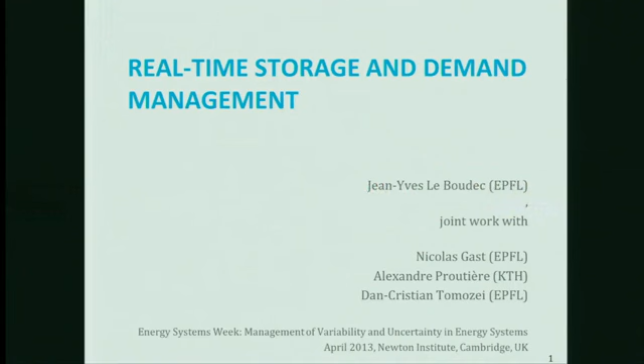The work I'm doing is supported by a project, Swiss Nanotera S3 Grid, where the goal is to build an active distribution network that will use storage in the form of pools or lakes inside the distribution network, essentially to cope with the volatility of renewables, such as solar PVs in Switzerland.

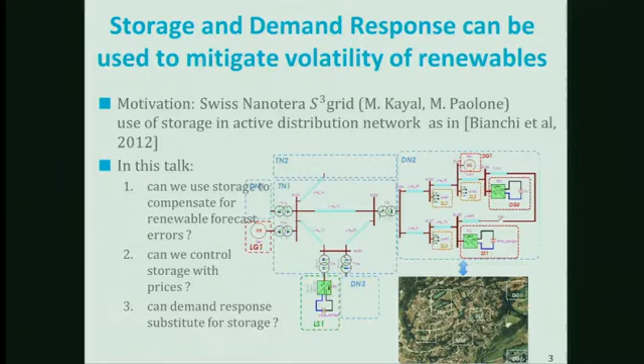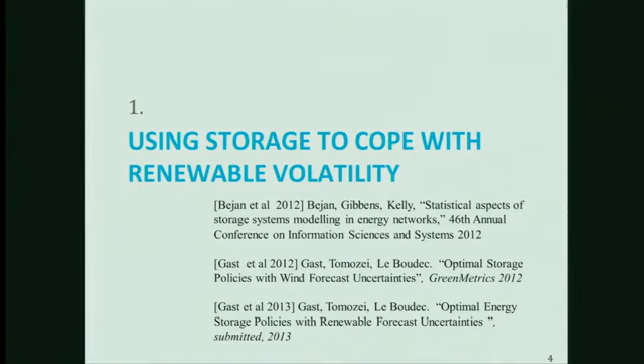I'll talk about three things, at least two and three if time permits, which have to do with storage and volatility of renewables. The first topic is based on a presentation given a year ago by Alexei Bejan on the statistical aspects of storage systems that intrigued me, so we did further research on it, and I will present the results today.

The problem is in the real-time or quasi-real-time setting, there's no market here, there's just an operator, for example National Grid or Swiss Grid, or even a more local operator, that has both the problem of variable renewables, wind for example, and some storage, for example a small lake or a big lake somewhere. The operator would like to compensate the forecast errors of the renewables with the storage.

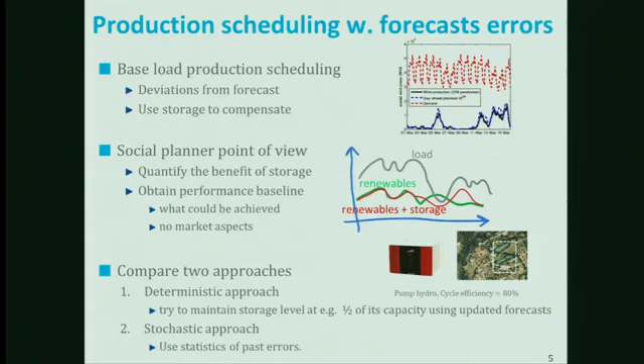We would like to look at what are the benefits, and as we will see, say something about the performance that is as generic as possible, as opposed to just optimizing a given cost objective. We will look at the deterministic approach, that's the one by Bejan, Gibbens, and Kelly, and say a few words on how this can be extended.

So first, how the system model is. This is a model without grid, so no transmission network. So Yves, please forgive me. We assume here we have essentially the problem of scheduling in advance the dispatchable production based on a forecast of the load and of the renewable production. So if we think...

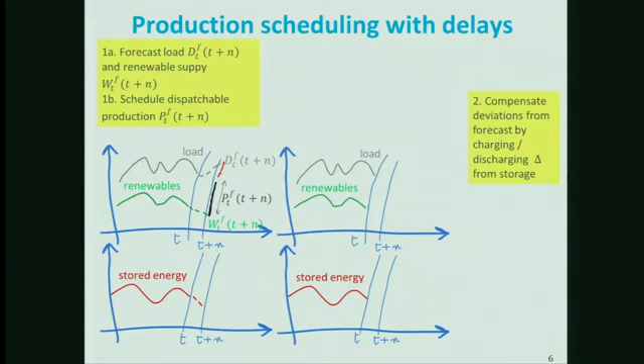If we think this will be where the forecast will be for both of those things, then we need to bridge the gap, and we can bridge the gap by allowing for some production that we will dispatch, and we can also decide to pump some water from the storage, or discharge the batteries if this is batteries. Now this is the forecast. Based on the forecast, there will be a given decision for a given commitment here.

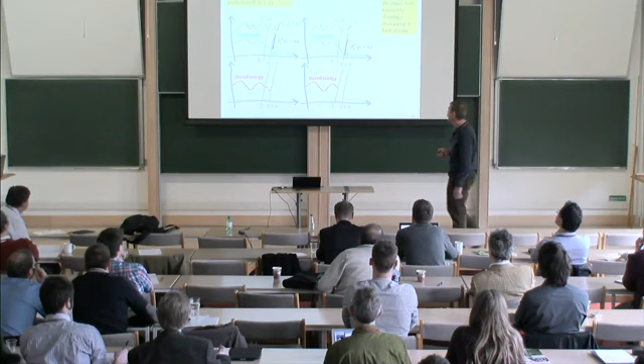Now in real time, of course, we will compensate for whatever deviation from forecast happens using the storage that we have. So in that case, we may need to use more energy from the storage than was initially planned, and the level, if this is possible, given the constraints of the storage. So that is the general framework.

Now, if we do that, what can happen? Well, first, we assume that we can always compensate by using some fast ramping sources. So we've put enough reserve in the system so that we can always compensate. And this is what we'll have here. But that is something we would like to minimize, or at least to quantify. So one thing we'd like to understand is what is the amount of reserve we need when we have such a system.

It can also happen that our forecasts are wrong in the sense that we are forced to spill some energy. Some of the renewables cannot be stored, for example, or we had dispatched so much energy that we cannot store everything that is spilled. In general, this is only one part of inefficiency.

We can spill out energy, but there is also a loss of efficiency due to storage itself. If we store something, we assume there's a penalty. It depends on the size of the storage. If it's lead-acid batteries, the inefficiency may be very large, you may lose half of the energy in a cycle. Here we assume more professional grade storage systems, either Leclanché type batteries or pump hydro. For large or mid-sized systems, we can assume 70 to 80% efficiency. But we do assume there is a loss. And of course, we don't want to store more than necessary because that, at the end of the day, causes a loss.

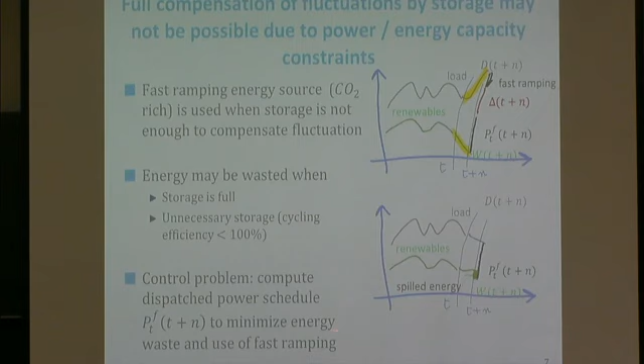The control problem is to compute how much we schedule in order to minimize two things: we want to minimize the energy waste and the use of the fast ramping.

Here is an example of policy that we can call the fixed offset policy. It consists in saying, well, in my forecast world, I think this is what I will need, and I decide to have a given reserve, a given offset from this. Here it's a negative reserve, it could be a positive one. And that is one policy. Whether it's good or not, that's another story. Intuition says it should not be good.

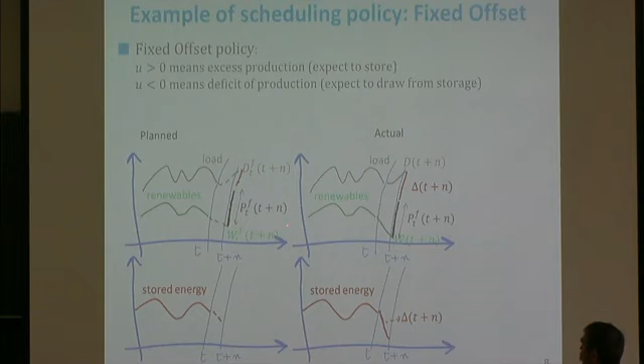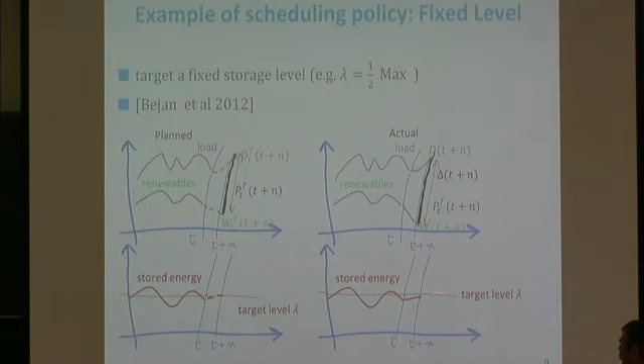But that is one possible policy. Another possible policy is to target a fixed storage level. This is the work of Bejan, Gibbens, and Kelly that I mentioned at the beginning. Here it consists in targeting not a fixed offset in your schedule, but looking at the stored energy. So it tries to forecast what would be the level of the storage given all our decisions, and we will take decisions to try as much as possible to reach a fixed level. Of course, it's never possible because of forecast errors, so we will have a deviation from that, but this is what we try to reach. So this is another policy that we call fixed level.

We have already two policies. How can we compare them? We can compare them by plotting them on two axes for a given grid that has a given statistic of production. And we have two metrics. Of course, things are always better when you have a single one. We have here two things we would like to reduce as much as possible: one is the amount of fast ramping energy, and the other is the amount of lost energy, which is either spilled or lost because we cycle many times here.

If we look at, for example, the fixed offset policies, depending on the offset, here the values are in percentage of the average wind power. So if we put an offset, a reserve of 200% of the wind power, or a deficit of 200%, then we have very different performance trade-offs. Here we are being very conservative in terms of we will never spill out wind, but we will use a large amount of reserve. Here, that's the opposite that happens, and if we just balance, we'll be somewhere here. Here's an example of three policies and how they stand. Of course, they cannot be compared in a unidimensional way, but we can plot them on this plane.

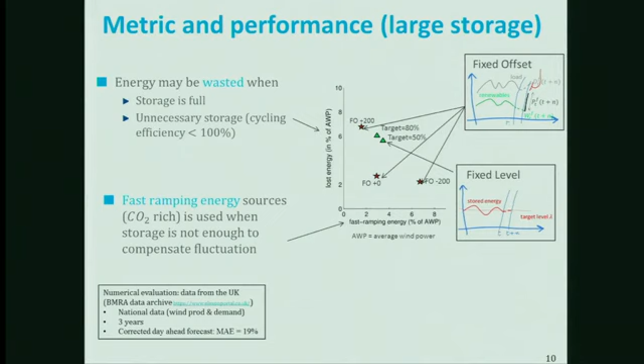And here is what fixed level, for example, for this case would give. Of course, I'm cheating a bit because it looks like fixed level is less good, but those are, of course, at given levels — we don't know what the optimal level should be. And the question is, that we addressed here, can we do better than those two policies? Or more general, is there an optimal thing? Is there something we can say in general about those metrics?

The answer is yes. There is, at least in the case of large storage. Large doesn't need to be very large — large means 1 day of production of wind energy, for example, or order of 1 day. If the storage is large enough, then we have the following result: I can build a curve, which we can call the LG curve. For every fixed offset U, I can compute a metric which is based on the distribution of the forecast error. This is a theorem, therefore there are assumptions that invariably will not exactly be true in practice.

Here we assume that the forecast error for a given forecast horizon has a given distribution, which we call capital epsilon, which is always the same every day — so stationarity of the forecast error. We don't assume that the forecast errors at different horizons are independent. We don't assume that kind of thing at all. But we assume we have this distribution that is well defined and that we got from statistical analysis of data.

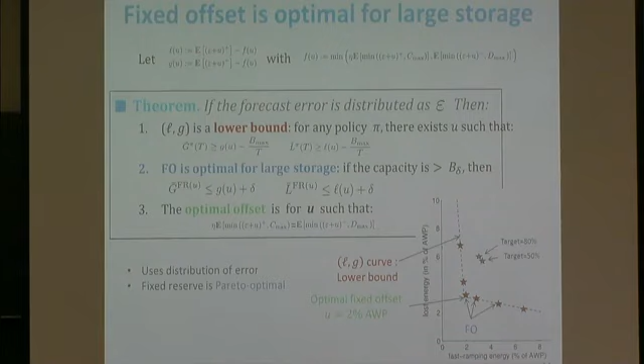If I have that distribution, for every value of U I can compute an L and a G value. If I run all the possible values of U, I obtain a curve, which is the dotted line here. And then, theorem: in the limit of large storage capacity, any policy, whatever, dynamic, non-dynamic, stochastic, non-stochastic, will always be above this line. So anything has to be inside this area. We cannot do better than that.

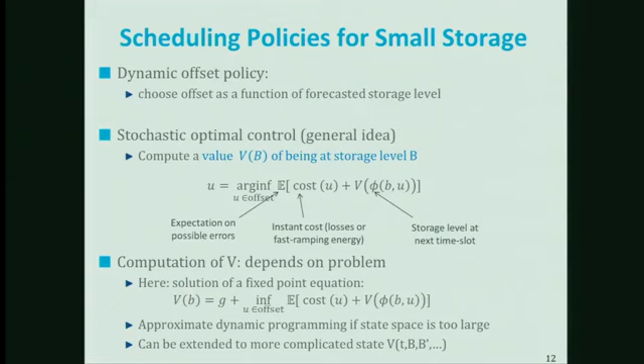Second, in the limit of large storage, we are exactly on the line, and this is achieved by having fixed offset — so very simple policies. So in some sense, we don't say what is the best policy for a given case, but we know exactly there is a line, and this line can be computed, at least numerically, if we know the statistics of the forecast errors. And this is what we did here for some example. Now this is for large capacity. For smaller capacity, we don't know whether there is a bound or not, but by dynamic programming, by Markov decision processes, we can compute, at least with similar assumptions as in the theorem, an optimal solution.

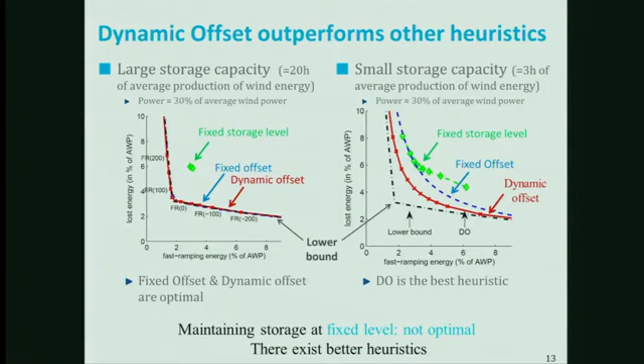If we plot it, we find that, for example, if the storage capacity is 3 hours of average production, then with the optimal policy, the red curve here, we are on this curve, which seems to be lower bounded by the bound, because it's a bound, but it's not achieved. The optimal one, the numerically optimal one, doesn't achieve it.

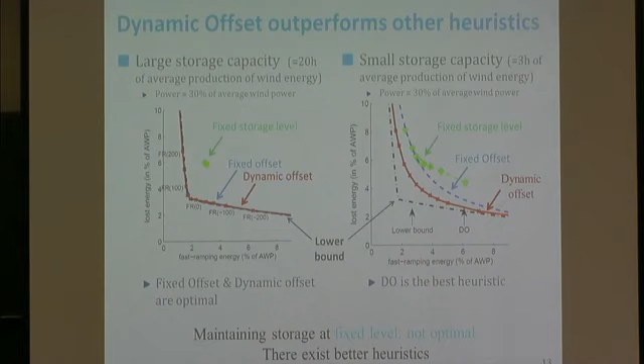For large storage, and again large is like about 1 day of production of wind energy, we are on the line here. Interestingly, the fixed storage level, which seems to make a lot of sense, is far away from this Pareto line. So maintaining storage at a fixed level is not optimal. If you have statistics you can rely on for forecasting errors, there can be better things in terms of reserve and energy efficiency.

It's not a theorem, but we found that in all the cases we studied numerically, the curves for large storage always have this shape with a pronounced knee, which means that if I'm trying to optimize for real, to save money, I'll probably optimize for a combination of the two criteria: the use of reserves and the energy efficiency, minimizing the loss. Then we see it's a good idea to stay in that region, whatever your criterion is. So it's a non-parametric optimality statement we can make here, because if I move a lot from here, I will increase the reserves a lot without much gain in lost energy, and vice versa. So there is really, at least when storage is not too small, an optimal operating point that is largely independent of how you weight the different combinations.

This can be used to dimension the reserve we need when operating such a grid, which is, I believe, traditionally called a secondary reserve. In the case we studied, based on the same data used in Bejan, Gibbens, and Kelly, taken from National Grid, we would need about 2% offset of the average wind production for the optimal reserve. So this was the first analysis, first result, based on models. It tells us a few things.

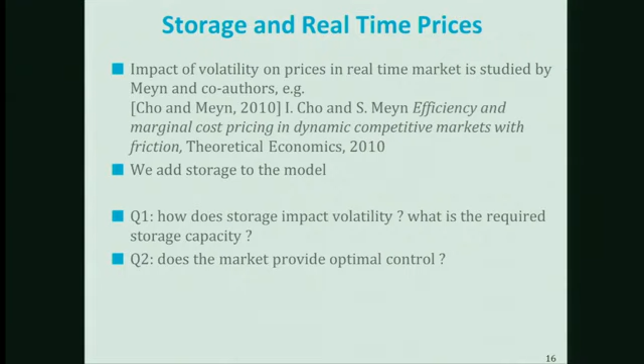Another way is to start from work presented by Sean Meyn a year ago to us at EPFL, on the impact of volatility on prices in the real-time market. So now we ask: what if we add storage that should reduce volatility? Let's combine the two things, and this gives us an interesting model that combines demand, supply, and now storage.

So here's the model. I apologize for the complexity, but I'll try to explain it here. That's a model of the real-time market. We assume there is a day-ahead market that has set up supply, GDA, and forecasted demand, and of course we try to match the two, perhaps with a fixed offset.

Then in real time, there is a deviation from forecast, which is as small as 1.5% if we use the previous speaker's method. There's also a deviation from forecast for the renewables, which is likely much larger from the numbers we know. Then there is another term, the real-time adjustment of production, capital G of t, which is a control. That's the model of Cho and Meyn, which is the model we have if we do not have buffer storage here. Of course, there will be a market between the two. We'll see that in a minute.

Now, if we add storage somewhere, there's an additional control, which is what I do with the storage. I can extract energy from the storage, or I can insert energy into the storage.

To simplify things, it's important to keep into account that storage is not perfect. We lose some energy by storing it. We model that through this eta parameter: if U is positive, then if we extract energy, U is the energy we can extract. When we put it into the system, we offset, for example, 20%, which isn't saying we physically lose the energy when we extract it, but that's a way to model it here.

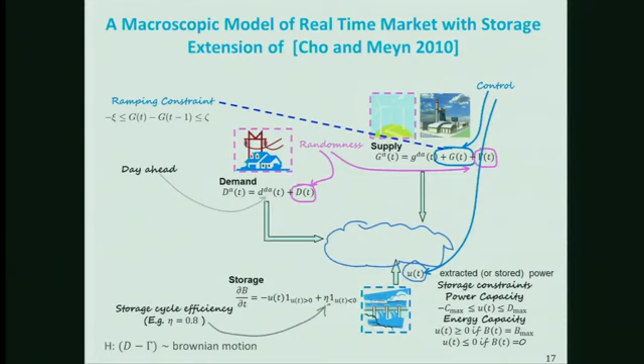So this is, I would say, all the actors of the system. Important: there is also friction in the control here. We assume that we cannot add production instantly, but that we have ramp-up or perhaps also ramp-down constraints. And this is the equivalent in discrete time.

We looked at three scenarios that differ on who owns the storage. In the simplest case, the storage is owned by the provider. So this is a model where a provider owns storage, or perhaps a dam used as storage.

In that case, the market consists of an exchange of energy over the market, and the control U is invisible to the consumers or to the distributor that serves the consumers.

We assume here, this is verbatim from Cho and Meyn's paper, the consumer's payoff is proportional to the energy actually used minus the penalty that occurs when there is a deficit of energy. I'm not assuming there is demand response here, so there is simply frustration, blackout if you want, that has a choke price, minus the price on the real-time market and the price on the day-ahead market at this moment. The supplier's payoff is similar: the supplier has a production cost and cashes money from two markets.

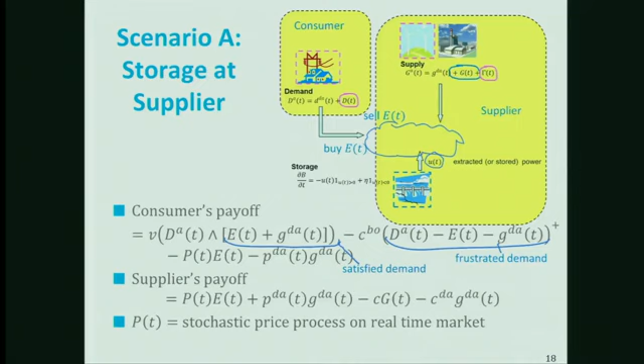Here, all the capital letters are assumed to be stochastic processes of any type. We don't make specific assumptions, but we do assume that the deviation from forecast, D minus gamma, is a Brownian motion, which is the simplest model that represents forecasting errors.

In this context, the classical definition of a dynamic competitive equilibrium would be that there is, by the invisible hand of the market, a price process and an exchange process, a quantity exchange process E, and then the controls G, U, such that both players, the consumer and the supplier, are happy with the same processes.

So the consumer is trying to maximize its welfare, which is the integral of its discounted payoff. And similarly for the supplier, given constraints that may incorporate the friction constraints on the ramp-up G, and of course the constraints on the storage I gave before.

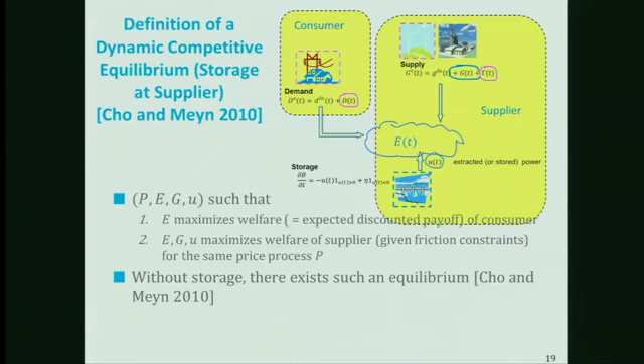If we don't have storage, we know such an equilibrium exists by the paper of Cho and Meyn. What happens if we do have storage?

But before getting there, let me mention the two other scenarios. Another scenario is if the storage is at the consumer. When you say consumer here, it's perhaps a market aggregator or a distributor, somebody who serves a number of end users who might own the storage.

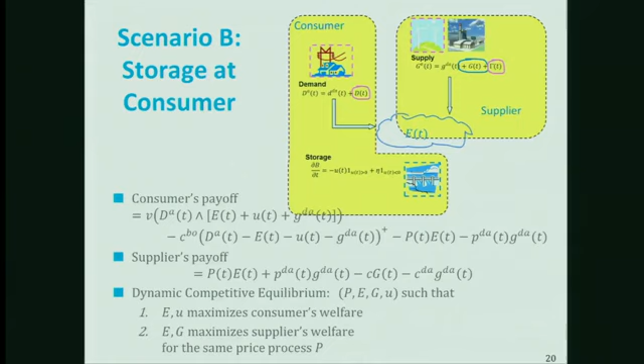That happens, for example, Service Industriel de Lausanne, that serves us where I live, has a little dam and uses that for compensating market fluctuations. In this case, the problem is very similar. The details vary a lot. The control of the consumer now includes the storage U, and the supplier does not. But apart from that, we can define in the same way a dynamic competitive equilibrium.

The last case is if the storage is operated by a standalone company that has to make profit just on running the storage, buying or selling depending on the price. In that case, there are different flows of exchanges: the amount of energy bought by the consumer, sold by the supplier, and sold or bought by the storage. That gives us three variables here. Apart from this additional set of variables, we have a similar definition of a dynamic competitive equilibrium.

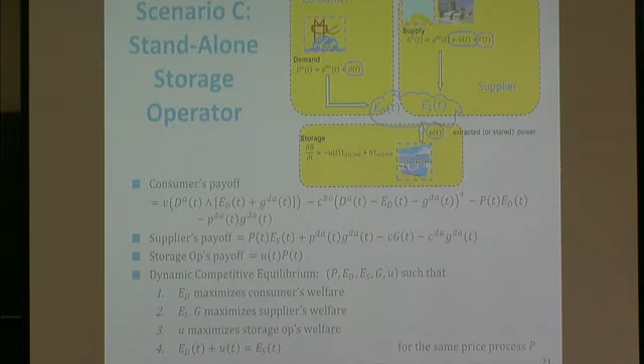Here we assume that the storage operator doesn't have running costs, or that the running costs are independent of what happens. When you have a dam to watch, you do that whatever you sell or don't sell, which is only an approximation. If you have batteries, they get older with how you use them in a complex and hard to predict way sometimes. This is not in the model.

Well, we have three scenarios here. For each of them, we ask the question: is there a dynamic market equilibrium? The answer is yes for all three cases. And the market equilibrium is essentially the same, modulo the differences in control variables, but they are essentially the same.

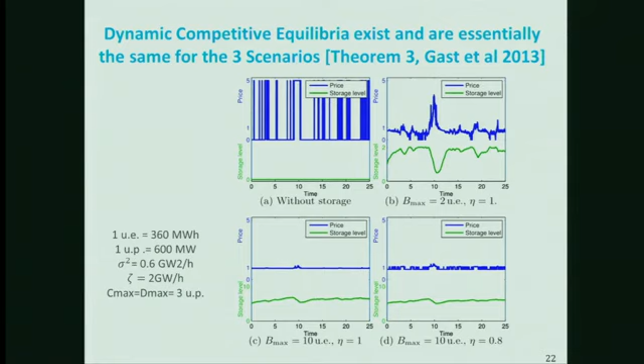As soon as we introduce storage, we find that the prices with some amount of storage become smoother. With a large amount of storage, the prices become much smoother and are very far away from the choke-up prices. We also saw that the evolution of the amount of storage in the reservoir tends to be fairly stationary as well.

Market equilibrium is one thing, but the real interesting thing is social optimality. Is the market driving us to a social optimum? In the case without storage, Cho and Meyn show that yes, the market equilibrium is socially optimal.

The same question is asked here. The social optimum consists in saying: assume I am in a well-governed ideal land where there is a social planner that plans everything. So that was what Marx believed would happen in communist countries. This is highly idealized, and of course doesn't pretend to be a model of reality, but just a way to represent an optimization problem.

So here we try to take the payoff of all the agents in all three scenarios. We have three social optimal problems, if you want, except that with the price structures we have, the total payoff is the same for the three scenarios, and the prices disappear from the equation, so that the social optimum will be the same for all three cases and can be computed.

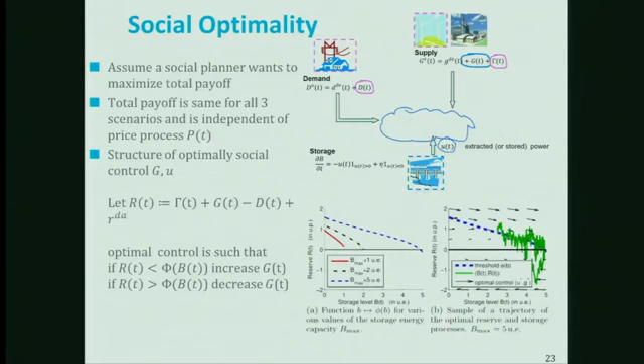Here is a sample path of a possible trajectory. We see that in principle, when we are here, we try to go back to the blue line. If we are below, we try to come back to it. But random deviations, of course, will bring us away from this ideal line where we try to be. But there's a control law that can be computed numerically for reserve as a function of storage level, or storage as a function of reserve.

Now, there is a social optimal that we can compute, and then there is also, similar to the case without storage, any dynamic competitive equilibrium for any of the three scenarios maximizes social welfare. We could stop here and say yes, the invisible hand of the market works.

Of course, this is a highly theoretical, academic paper, so there's a lot of hidden things. In particular, we assume here a very perfect market where all the players are price takers and are not trying to manipulate the prices. So for every minuscule fraction of storage, they obey the market instead of imposing prices, which might not be true, in particular if there are only a small number of large players. But still, it says there is some hope that things could go well by controlling the storage through prices.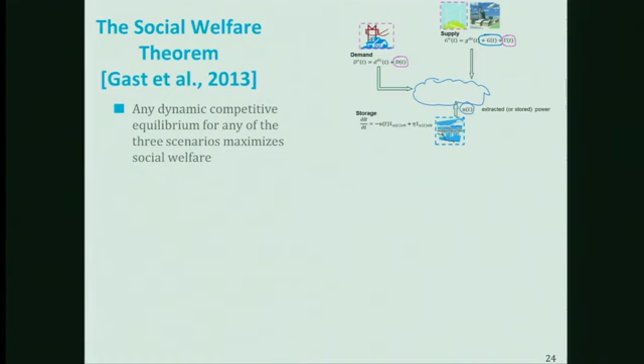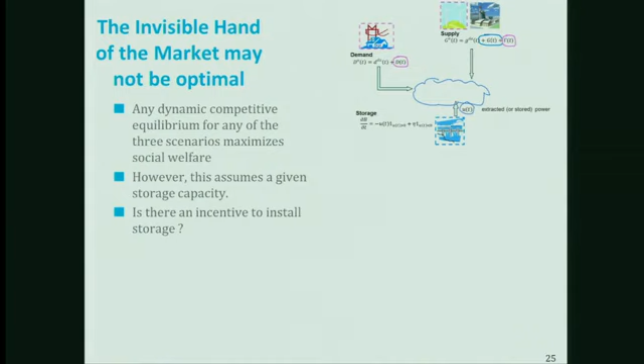This is true, but only on the short term horizon. What is not in this model is capacity planning, and is there an incentive for anybody to install storage? That's another question we could ask, but we did not ask. However, we can say something on a question we didn't ask.

If we look at the curves, we can compute the expected social welfare, for example, as a function of the installed storage capacity. The blue curve is the one of interest: if we have zero storage, we have a given welfare, and as we increase it, prices become smoother, volatility of the wind is reduced, and social welfare increases. So it's monotonic in the installed capacity, and like any buffer system, after some level it saturates, which is as you'd expect. Once you have enough storage, adding more doesn't help.

However, if we look at the expected welfare of, for example, a standalone operator, we see this blue curve: as storage increases, if you have zero storage you don't make any money, so your welfare isn't good. If you increase it, you make more money, but then it decreases, going back to zero. It decreases because prices go down—there's less volatility. Remember, a storage operator lives off the difference between high and low prices. So at some point there is a maximum. If we compare the two curves, the maximum is at 1 unit of energy, which is very far from the social optimum.

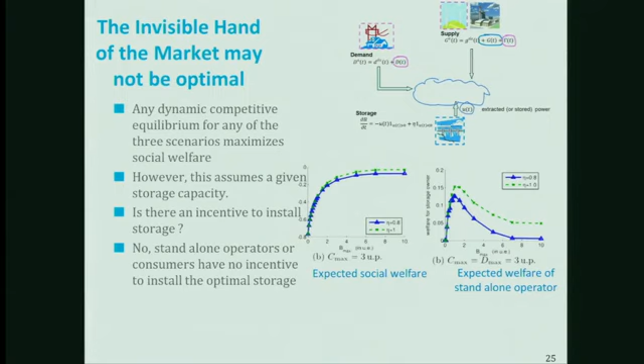We can also easily, because we have a tractable model, look at scaling laws, which are of interest if we believe new regulation will increase the amount of renewables. So we ask: how does all of this move when we scale things? Sigma is the volatility parameter—the parameter of the forecast error of the Brownian motion. If we increase it, we get a scaling law for the optimal storage capacity. First, we see that as a function of storage capacity, the social welfare curves often show that being at the optimal really matters.

Sometimes it's misleading to look at how the optimal depends on a parameter, if being a bit below optimal is still good enough—but that's not the case here. Very often, for many cases, we do need to be close to the optimal. We see that the optimal storage capacity scales like this.

This is the volatility, and this is the ramp-up constraint. So if we increase the volatility by X, and the ramp-up capacity also by X—which will come naturally when we introduce renewables in areas that don't have them, at considerable capital expense—even if you compensate the volatility by the ramp-up capacity, you still need to increase storage by X. So essentially, it's very bad news: the storage requirement increases sharply as volatility increases.

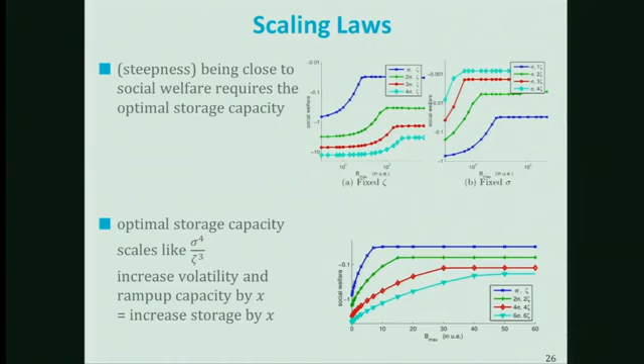How am I standing with time? I think I have 10 minutes. Okay, then I can move to the rest.

So what this suggests is that with a free and honest market—in this highly idealized version—storage can be operated by prices. However, there might not be enough incentive for storage operators to install the optimal storage size, which is a critical point because capital investment for storage is very large, whether you use batteries or pump hydro. This should be contrasted with the fact that in many countries we subsidize renewables but don't subsidize storage—in fact, in some countries storage even has to pay the grid tax. So this is perhaps an alignment of incentives that should be considered.

The third ingredient to compensate for the volatility is, of course, demand response. So here, I'll talk of a model of real-time demand response that we did one year ago. In particular, it tries to look, at least qualitatively, at whether this nightmare could occur.

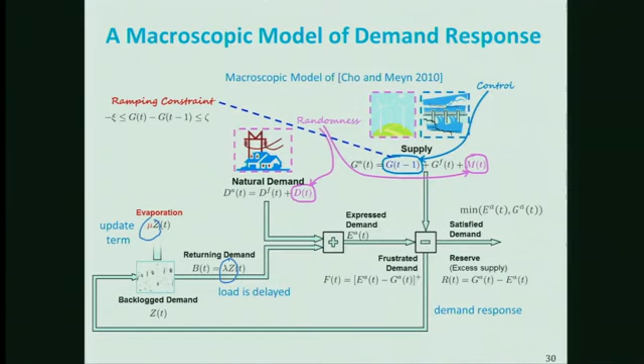Whenever the total supply is inferior to the expressed demand, we assume in this highly idealized model that all the demand that cannot be satisfied is simply subject to demand response. So there's no blackout, nobody is really dissatisfied. The pool of demand response is large enough so that can always happen.

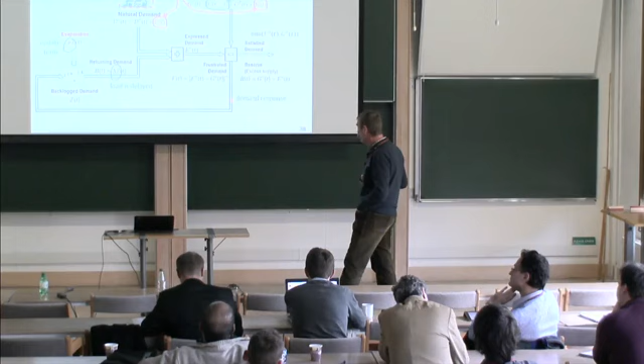However, the demand that is delayed, what will happen to it? Well, it will come back sooner or later. Not entirely. If you look in detail, if I switch off my heater in the UK or my air conditioner in warmer places, when I switch it on again, I'm probably not using the same amount of energy as the one I've saved. Perhaps I've accepted a small variation of temperature, a degradation of quality of service.

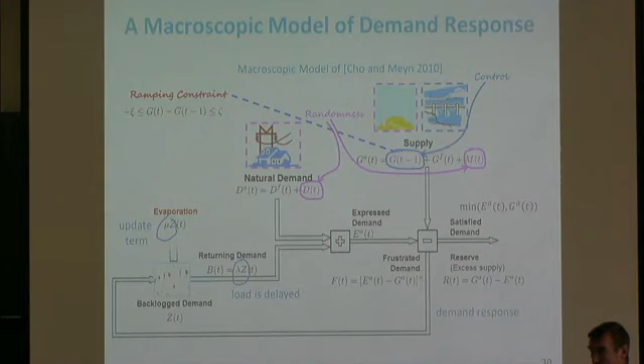Therefore, there might be what we call some evaporation. Evaporation means some of the energy that virtually I would have needed to satisfy has evaporated. It's gone away and will never come back. And then some of it will come back. We use a differential of the backlog here, simply saying it comes back at a constant rate proportional to the size of the backlog of energy. This adds up to the naturally occurring demand, the one that was forecast, for example.

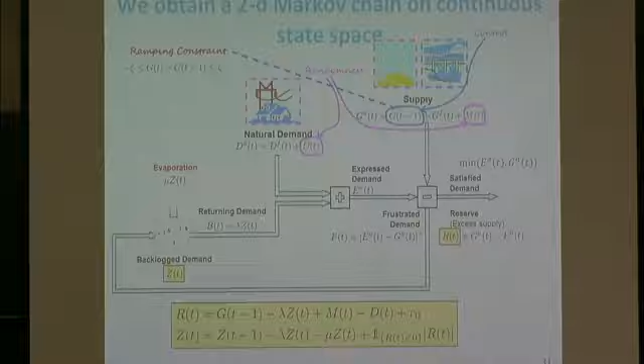So that's the model. What do we do with this model? We assume, like before, that the deviation from forecast is Brownian motion. Here we did, for tractability, a discrete time model, so the equivalent is a random walk model. And then we obtain a 2D Markov chain, so that can easily be simulated, at least.

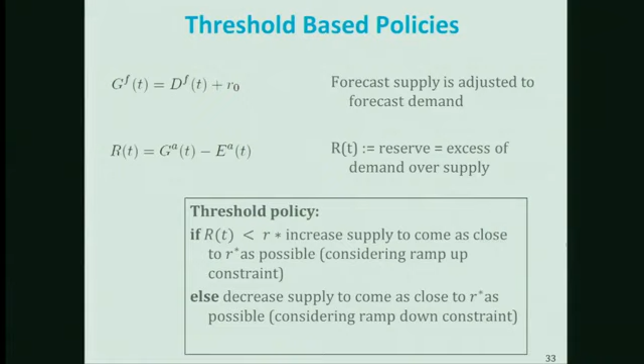The control problem, like before, is simpler: we have no storage, it's for the supplier to control the amount of production, given ramping constraints. We assume here also a threshold policy, very similar to the reference idea.

Here is a small simulation of, I would say, an optimistic case where I assume the evaporation has some value mu positive, and this is simulating a day in the real-time market. On the x-axis is the reserve, which is the amount of production that's adjusted in real time minus the demand. And on the y-axis is the backlog — the total energy that has been subject to demand response, has not evaporated, and will come back.

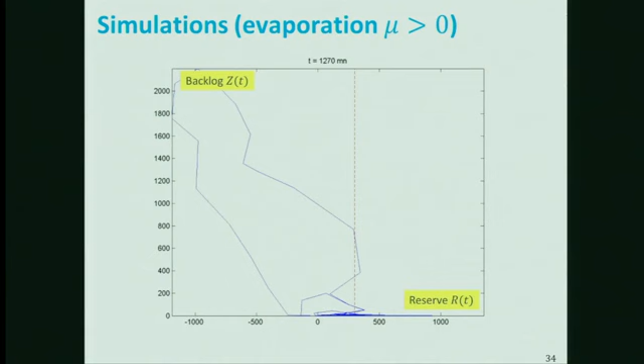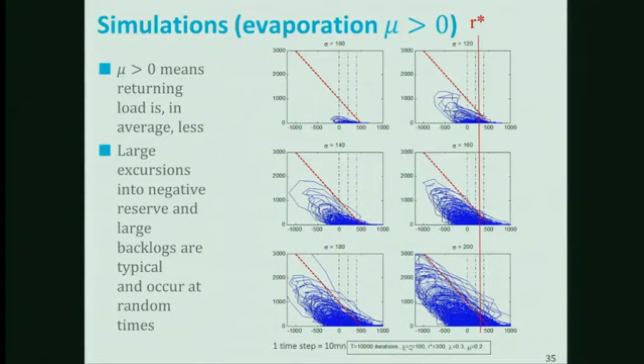We see that one simulation gives that. If we do many simulations, for mu positive, we find something like this: some simulations where during a day nothing happens, and others where a lot of nasty things happen. In fact, we always find a probability of rare events that are large excursions into negative reserve and large backlogs. At least in this model, these are completely unpredictable — they may not happen one day with exactly the same initial condition, or they may happen, and if they happen, they can be very small or very large. So it is just a sign of an unstable stochastic system.

For example, here are two examples of days where day one this happened, and day two this happened. Now, of course, you can try to interpret: well, this is because the sun has been shining a lot, or there was a football match and lots of people have done that. But in our model, there's nothing of that nature.

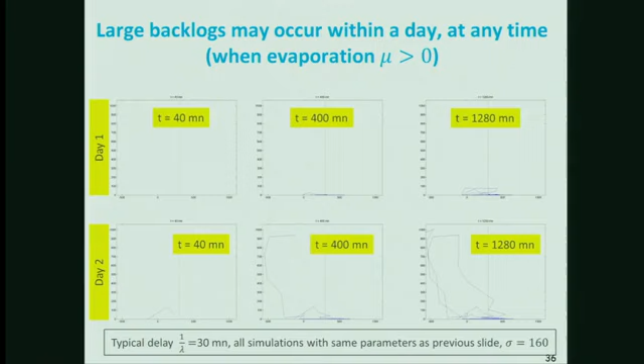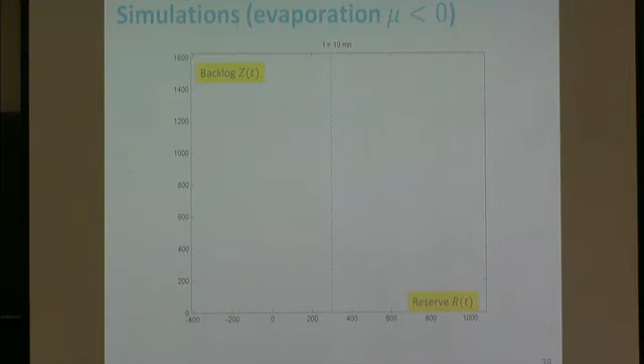What we do see, however, is that if by bad luck we have a deviation from the stable point, that gives us trajectories that may lead us very far away. Now, there might be noise here also, so you don't follow exactly the trajectory. So if you have bad luck, if you go to the left several times, you might end up going very far away. But eventually, you will come back. So, in fact, the system is stable when mu is positive.

When mu is negative, you would have a nasty system that, by delaying things, makes things worse. So if I do not heat my house now, but heat it 6 hours later, mu negative means I will need more energy to heat it than the energy I saved by not heating it now. We believe, by simple house thermal models, this is not true. This negative evaporation could happen only with highly nonlinear systems, for example heat pumps, that operate differently at night versus in the day when the air is cold versus hot. So there might be cases where that happens, but normal resistive thermal systems will never have that behavior.

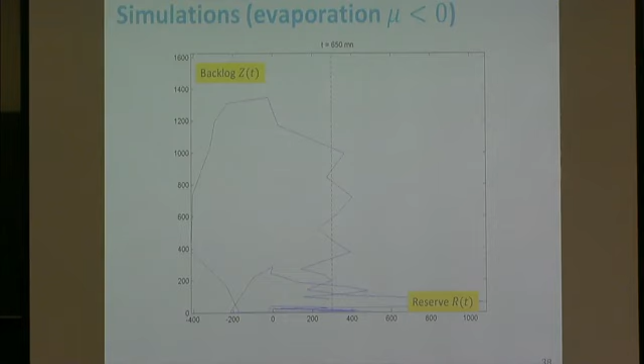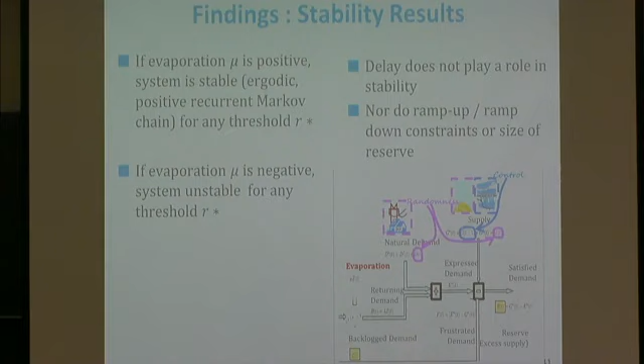If the evaporation is negative, then things are simpler: the backlog grows forever, and you find things that are fairly catastrophic. So in terms of stability, I said the system is unstable, but it's an interesting and intriguing stochastic model where if we do simulations, we can do many simulations and be happy the thing doesn't move much, or unhappy because it moves a lot. If we look at the ODE, we'll say it's stable. And in fact, mathematically, we can prove it is stable in the sense of a Markov chain. However, it will qualitatively have large excursions away from zero, from the stationary point.

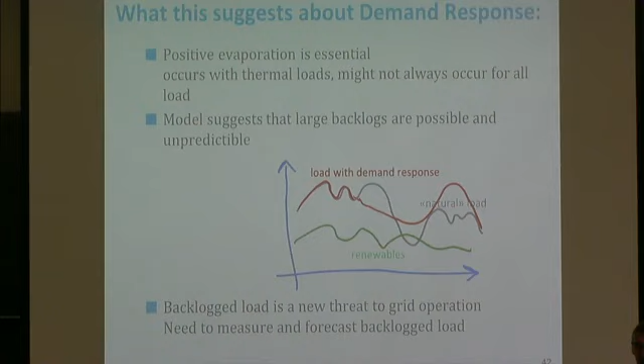What does this suggest about demand response? Well, demand response is very attractive as opposed to storage. What you need to install is very minimal compared to storage: you send messages to people, switch off your lights now, switch off your heater.

Everybody does it, and it's wonderful. However, it suggests that there is a large level of unpredictability that is input into the system due to demand response, and that goes well beyond the simple fact that if you don't cook now, you will cook an hour later. It's beyond that. The small accumulated frustrations might build up without any specific deterministic reason.

So what this tells us is that if we do demand response, we need to be able to observe this latent load, which nobody does today, as far as I understand. In our model, the nasty thing is that Z, the total backlog, is not observable. It is things that people would like to do and could not do. If we observe it, then of course there would be other controls that could stabilize it much better than what we said. If we don't observe it, we are likely to have the scenarios I described.

Voilà, I'd like to give credit to my co-authors, but my screen has disappeared. So I would like to mention that this is work I did with Nicolas Gast, Alexandre Proutière, and Dan-Cristian Tomozei. Thank you.